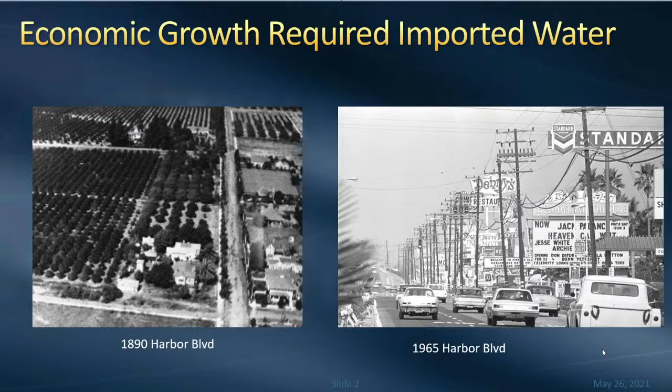Our water supply today here in Anaheim, like many other Southern California agencies, comes from a combination of local supply, or groundwater, and imported water, which comes from two different sources. Next slide.

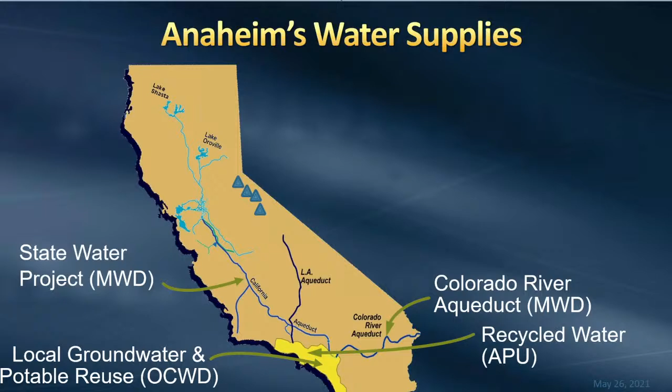About three-quarters of our water normally in a typical year comes from the local groundwater supply, and about a quarter of it comes from imported water, both the State Water Project and the Colorado River Aqueduct. A small portion is recycled water from our plant across the street.

Next slide. However, the local groundwater is not always available to us, even though it is our cheapest source of water, due to dry conditions and other issues. For the past year, PFAS has been detected in our groundwater, and most of our wells are now offline.

So we are now relying more on imported water. As you can see here, three-quarters of our water this year is now imported water. This flexibility and diversification in our water supply sources provides Anaheim a tremendous benefit of reliability by having this imported water whenever we need it.

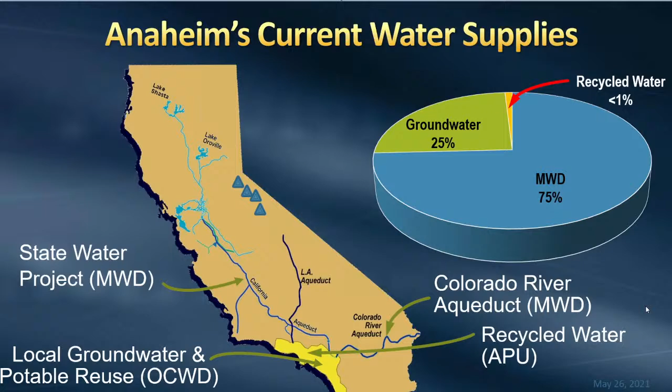Next slide. So Southern California has a similar story of being able to rely on that imported water. In a normal year, Southern California has an imported water demand, in addition to their local supplies, of around 2 million acre feet. We're going to use the abbreviation MAF for million acre feet. You'll see that throughout the presentation.

That comes from a combination, on typical years, of about 1 million acre feet from Northern California through the State Water Project, and 1 million from the Colorado River. This is what typically happens. However, next slide.

But as imported water changes, especially in Northern California, due to issues with the Delta and dry conditions, that water from Northern California isn't always there. So with that, Metropolitan Water District in some years looks to purchase additional water on a short-term basis.

Our presentation that Demetri Polyzos will be going through today will talk to you about why and how they decide to purchase water, primarily in Northern California, in years like this.

Go ahead, Demetri. Great, thank you, Michael, and a pleasure to be here with you all this evening. As Michael said, we have two imported water supply sources. So what I wanted to do first is really focus in on how we do our planning.

We go into every year planning for both dry conditions and wet conditions, drought conditions and surplus conditions, because we know that how the year starts may not necessarily be how the year ends. We've seen in the past many times a dry start can end up wet and vice versa. Well, unfortunately for this year, we not only started off dry, but all things are pointing towards a very dry end to the year as well.

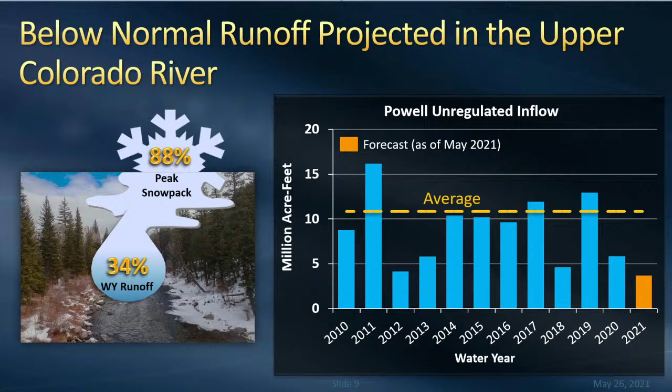In fact, the current projection for 2021, the bar graph to the far right, is projected to be the lowest in this time frame, the lowest we've seen in the last decade or so.

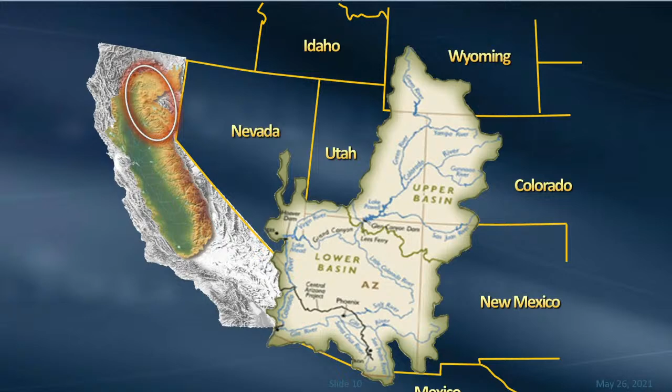And the same is really the case on the State Water Project. We'll focus here. The State Water Project supplies are generated in the Northern Sierra Nevada, and again, below normal snowpack, 72% of normal. Again, we're seeing the same thing we saw in the Colorado River system: the runoff is expected to be much further below normal, at 38%.

We have seen this situation on the Colorado River system before, but it's quite rare to see this on the State Water Project. This is one of the first times we've seen that disparity. But last year was also dry for Northern California, so these cumulative effects are really showing. The graphic on the right again shows runoff, and same as the Upper Colorado River Basin, only about 3 of the last 11 years are above average. Similar to the Colorado River system, the projected runoff for this year is projected to be the lowest it's been in this time frame.

So those are the conditions we're experiencing this year. Now, our supplies on the Colorado River side, despite how dry things are, the agreements in place and the way that system is operated mean we expect to not see any cuts. Very different for the State Water Project system. On that system, we're allocated year by year, so basically how the hydrologic conditions develop will dictate how much water we get.

Right now for this year, we're looking at a 5% allocation. That's the lowest we've ever seen. It's only happened once before, somewhat recently, back in 2014. But this is the lowest we've ever experienced. And that translates for Metropolitan.

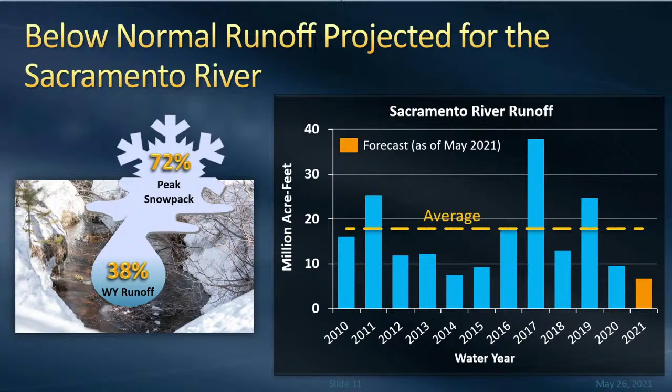I'll give you an idea of the volumes of water we're talking about as I stack up our supplies. On the Colorado, about 1 million acre feet, just as Michael indicated earlier. Again, no cutbacks on this system anticipated for this year, regardless of how dry things are.

But on the State Water Project, a mere 5% allocation. Our full, 100% allocation on that system is roughly just under 2 million acre feet. So 5% translates to about 0.096 million acre feet. On top of that, we're securing water purchases of about 0.032 million acre feet. We'll get into the details of that a little bit later. But all of this adds up to a supply of just over 1 million acre feet, 1.14 million acre feet of supply.

Now, our projected demand for the year is 1.7 million acre feet. So we have a disparity, a supply gap of roughly 500,000 acre feet. The question is, how do we fill this gap?

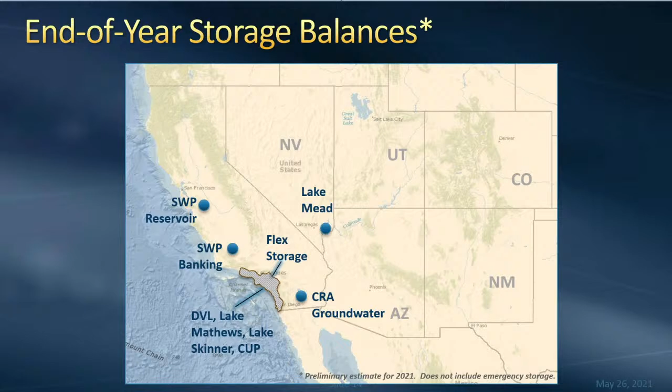But I want to focus in on the State Water Project facilities or programs. Part of our service area can only be serviced by water that comes through the State Water Project. These are the facilities, the programs that can help in meeting the demands for those portions of our service area that can only be served by State Water Project supplies or supplies conveyed through the State Water Project system. The graphic here shows the end of year balances of those storage facilities.

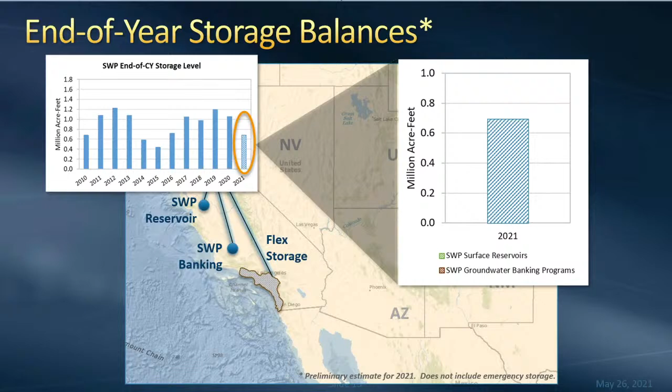We'll zoom in here where we are in 2021. We're looking at available storage in those reservoirs and those groundwater programs at about 0.7 million acre feet. You might be asking yourself, well, that's a lot of water. And it is. However, we need to dig a little deeper here and look at the details of the mix, the split between groundwater and surface water.

And what you see here, the majority of this water is groundwater. The challenges with groundwater, aside from water quality issues and the like, is that it has a small straw, meaning it takes time to move that water out of those programs. You have to, in many cases, pump that water out, and there are capacity limitations. As opposed to our surface water, which is represented here by a smaller amount, but there's a bigger straw for that water - water we can easily get to when we need it as we go through a year.

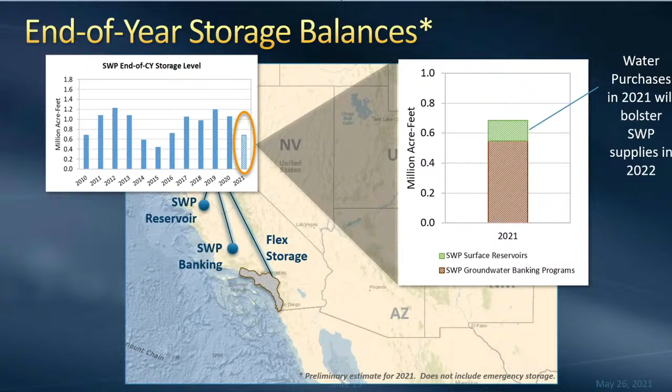So the purpose or the reason for purchasing water is not necessarily to get us through this year, but it's really to help bolster those surface water supplies for next year. I can't tell you where the State Water Project allocation is going to end up next year, but I can tell you the initial State Water Project allocation - we're going to start next year with a very low allocation. So the more water we have at the ready to use to service those areas in our service area that can only receive water from the State Water Project, the more surface water we have, the more reliable we will be. It's really keeping an eye out for what's going to happen potentially next year.

All right, so with that background as to what led us to the decision to purchase water, let's talk a little bit about the water that we purchase.

There's three basic types of ways that we can generate this type of water. The first is reservoir reoperation, and this is the simplest and most direct form or way. The surface water in a reservoir is essentially released, and then that water is transferred to a buyer.

The second type is groundwater substitution, and this occurs when a farmer uses groundwater instead of their surface water supplies. So the surface water that they would have used is then available to be transferred to the buyer.

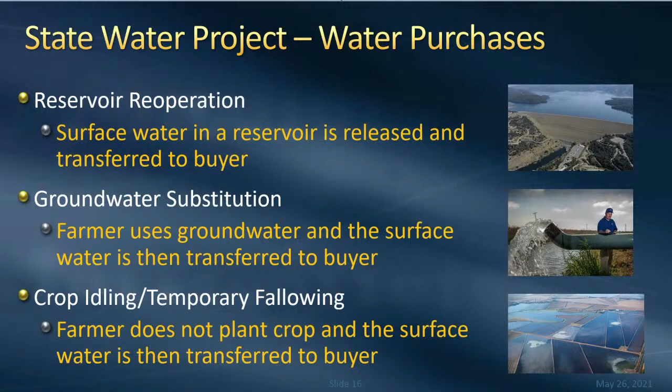And then the third is crop idling or temporary fallowing. This is where a farmer voluntarily chooses not to plant a crop, and the surface water that would have been used on those crops is then available and transferred to the buyer. So those are the three types of transfer supply types or purchase water types.

So let's talk a little bit about when that water is developed and how it gets moved through the State Water Project system. The water is typically developed between the months of May through September.

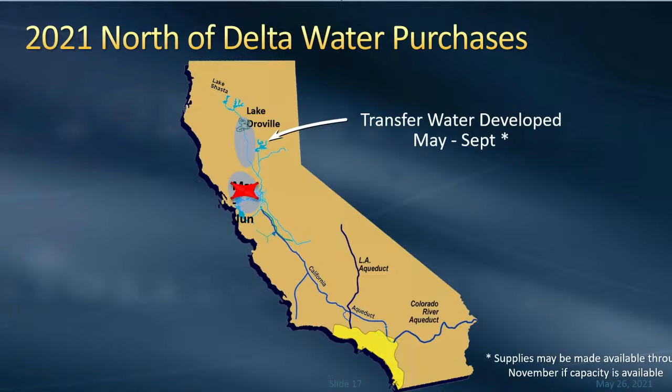The rub here is that water in the May and June timeframe cannot be moved through the Delta, based on environmental requirements and regulations. So that water can't move. It's developed, it's produced, but it can't be moved. So what we do is we store it in the State Water Project Reservoir, Oroville, up in Northern California. Then when capacity opens up in the summer months, when water is allowed to move through the Delta, that water is then conveyed through and pumped or exported out at Banks Pumping Plant.

There are losses associated with this water. You can think of it as a toll, like going through a bridge toll. Any of this water that is moved is tagged with a percentage of loss, typically 20%, but it can go as high as 35%. That's the range we're looking at. So for example, for every 100 acre feet of water that you move through the system, you need to leave behind 20 acre feet of that, if you're assuming a 20% loss.

Once you get the water through the Delta, it is then conveyed through the California Aqueduct and delivered to the buyer, in this example, Metropolitan. So you can see here, we are leveraging the infrastructure that has been built and that Metropolitan has been paying into, to be able to not only store the water until it can move, but then also move the water to us from Northern California.

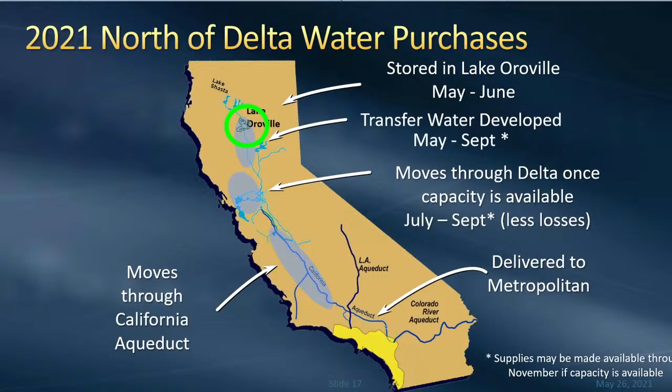So there are two types of north of Delta water supplies that Metropolitan is actively seeking or pursuing this year. The first is through the State Water Contractors Incorporated. This is a group of folks, a small agency up north that represents all or most of the State Water Project contractors, and they developed a buyers group. The State Water Contractors Incorporated negotiates for this water. This is done on an annual basis, and what was negotiated for this year was $625 per acre foot.

Just to give you some context, this is market based. The last time Metropolitan was in this purchased water and in this buyers group was, I believe, back in 2015. At that time, if I'm not mistaken, the cost was about $700 per acre foot. So it will fluctuate depending on the conditions of any given year.

Just to put this in perspective, keep in mind this is the water cost for the supply. Let's contrast that and look at our supplies from the State Water Project. Our allocation is 5% this year, but regardless if the allocation was 50%, 100%, there is no actual cost for the water supply. Where the cost comes in is moving that water to Southern California. So it's the power costs that are associated, and that's roughly $200 to $250 per acre foot.

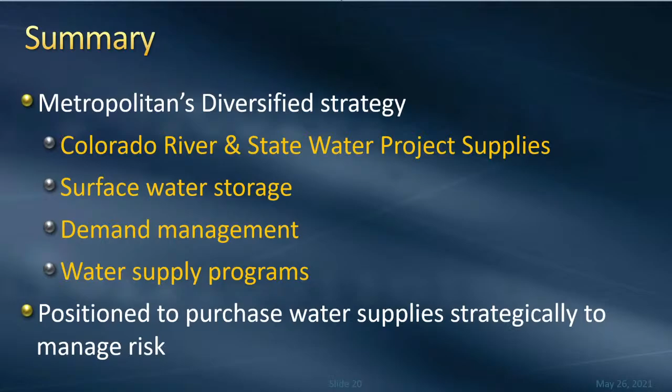At this time, I'd like to open the public hearing, which is item number 5 on the agenda, concerning the adoption of the City of Anaheim's 2020 Urban Water Management Plan and the 2015 Urban Water Management Plan Amendment. I have opened the public participation portion of this hearing.

I would like to explain the procedures that the Public Utility Board will follow in conducting this hearing. First, staff will make an oral presentation with supporting documents regarding the plans, after which the board will have an opportunity to ask questions of staff. Next, we will hear comments from the public, which may be in oral or written format. Each speaker shall have 5 minutes to provide public comment.

At the close of all testimony, staff will present closing remarks. After closing remarks, if any, the public hearing will be closed. Finally, the board may discuss all evidence presented to it, but may not ask additional questions or extend to the public who has testified without reopening the record.

Does any board member have questions as to the procedures for the public hearing? No questions. Does staff wish to make a presentation?

Yes. We have with us Philip Bogdanoff. He's our Water Resources and Planning Manager. He'll be providing a brief presentation on the plan and its relevance to us here at the city.

Thank you, Michael. Mr. Chairman, members of the board, I'd like to present a short presentation on our 2020 Urban Water Management Plan this evening.

For water agencies such as APU, believe it or not, a lot of the discussion around the water cooler is related to supply and demand.

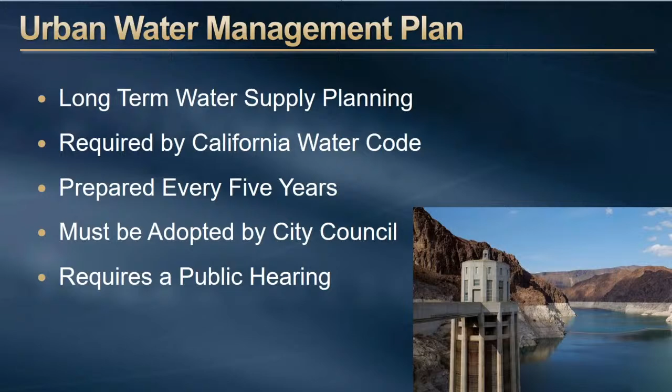Now, the urban water management plan does include a number of components to it, but primarily it is a document that does look at supply and demand. And so we'll go ahead and just dive into both demand and supply.

So we look at demands. It is important that we look at historical demands and historical demand trends, because that helps inform our projections looking into the future.

So if we look back about 20 years, we look at a single family home here in Anaheim with a family of 5, that home used about 220,000 gallons of water in the year 2000. That's about 15 average size swimming pools for the year.

In the last 20 years, Anaheim Public Utilities has invested in demand management programs. That includes education, public outreach programs to educate people to use water wisely, to not waste water. That includes rebate programs and incentives for low flow toilets, high efficiency washers, even outdoor incentives for turf removal to reduce usage outdoors. Another item that's changed in the last 20 years is that the plumbing code has been updated several times to require more and more efficient fixtures be installed for both new and retrofit construction.

So through these updates over the last 20 years, we've seen that same household in the year 2020 used only 140,000 gallons for the year. So through these demand management programs, we've seen demands decrease by over 30%. And looking at these trends, we do expect that these trends and behaviors will continue through the 25-year planning horizon that we are looking at in the urban water management plan.

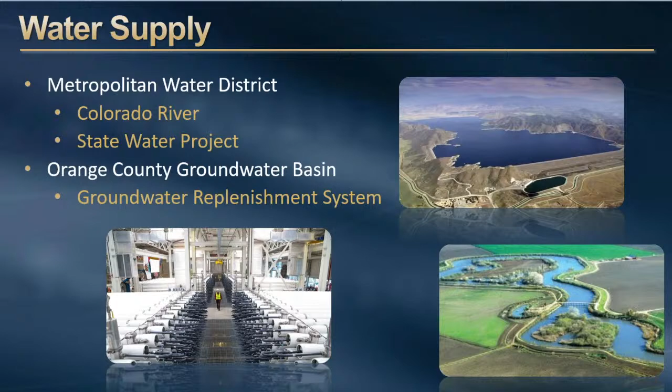Also, when we look at our water supply, we don't look at water supplies one at a time - we really look at the water portfolio. We try to balance our water supply portfolio in looking at reliability, looking at the quantity of supply that's required, and looking at what that cost is.

So as discussed, we look at the State Water Project, for example, and we've heard that over a period of 3 or 4 years, the allocation for Southern California has gone from 85% to 5%. That's a difference in water supply of about 1.5 million acre feet of water. So there's plenty of water to be had when it's available, but the reliability of that water source is highly variable.

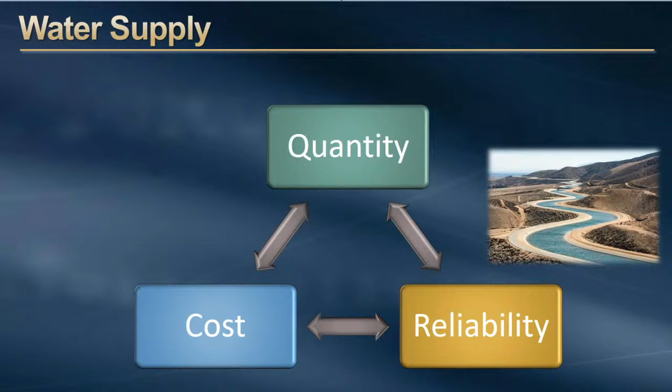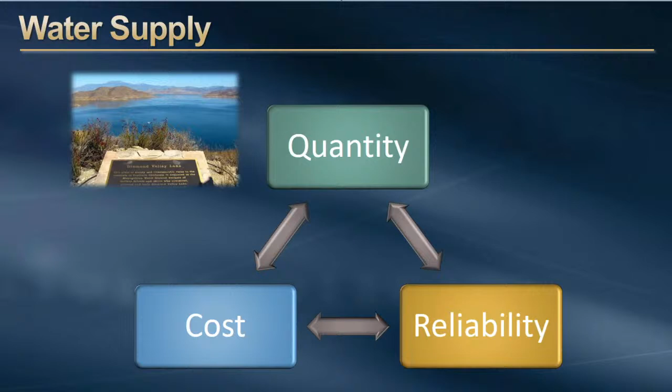To help mitigate against that, Southern California has invested in storage, such as Diamond Valley Lake, to help mitigate those swings in reliability. And finally, there's also water purchase, water transfer, and water banking programs, where some of these programs may not be the most cost-effective supply options, but they do serve a purpose in the whole - they help maintain storage levels and mitigate against the variability in reliability.

So all of these together make up that balanced water supply to ensure that we have the right amount of water at the right time to meet the demands here in APU.

Now looking a little bit closer to home, APU and other Orange County water agencies have invested in the groundwater replenishment system managed by Orange County Water District. This system takes treated wastewater, purifies it, and uses that water to help supplement and recharge the groundwater basin. What's so important about this strategic investment for APU and the other producers here in Orange County is that this project is an example of a water supply that checks all the boxes.

It provides us with a quantity of water proportional to what we use here. It's very reliable in both dry and wet year conditions and is at a very competitive price. Bottom line is that investing in this type of strategic project gives a very good benefit to our customers at a very good price. These are the type of opportunities we look for when trying to maintain or supplement our water supply.

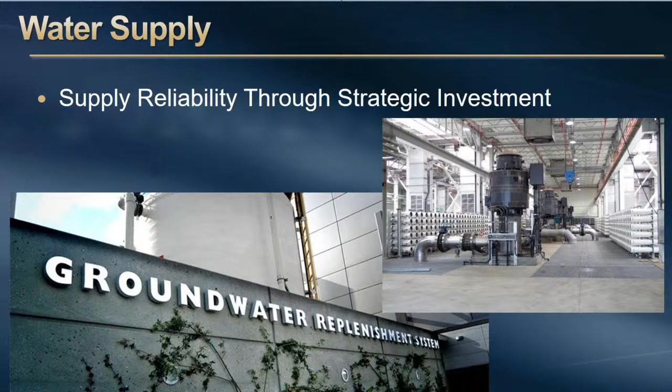So as discussed, the Urban Water Management Plan does contain a variety of factors that we need to take a look at. Principally, it's supply and demand, for which we talked about. However, there are a few items we did want to point out to you that are new for 2020.

In 2020, the Department of Water Resources now requires that water suppliers report on their energy intensity—the amount of energy used to supply water to its customers. Because it's a new item, DWR issued a last-minute update to their reporting requirements. That update is contained in the staff report and will ultimately be incorporated into the final report.

The second item is an amendment to our 2015 Urban Water Management Plan. Essentially, this document documents APU's reduced reliance on the Bay Delta, not only for us, but for Metropolitan and all the member agencies.

Why that's important is it shows that for any proposed project, such as the Delta Conveyance Project or the tunnel project in the Bay Delta, that project is not going to lead to an increase in reliance on the Delta. It shows that overall we're all decreasing our reliance on the Delta, and that the focus of that project is really to either maintain or improve the reliability of that water source.

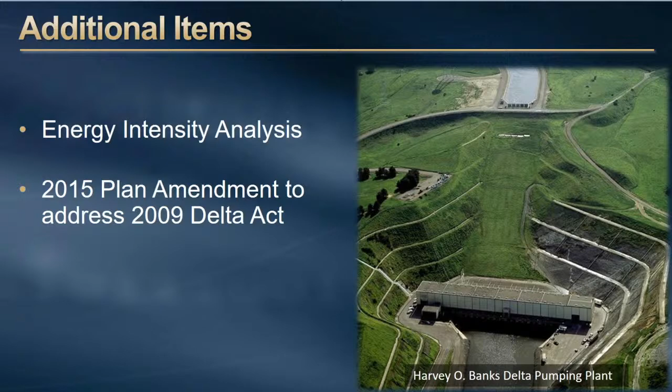Through this process, and through other studies Anaheim has done in the past, we've asked the questions and, just as importantly, we've been able to answer these questions related to supply and demand. Through this exercise, we've shown that Anaheim Public Utilities does have sufficient water supply to provide for the demands here in the city over the next 25 years.

We do not project any water shortages within the 25-year planning horizon. However, it is possible that Anaheim Public Utilities may be called upon again to pull those levers in the future because of a mandated reduction. But based on the analysis, we do not show any actual physical shortage that APU is going to experience over the planning horizon.

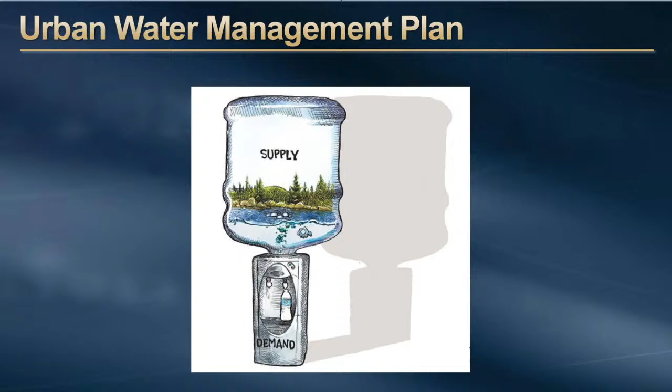To finalize the plan, the Water Code does require a public hearing, for which we're here this evening. It does require City Council consideration, for which we are asking you to recommend here tonight. After approval, that plan will be submitted to the Department of Water Resources by the July 1st deadline, and then filed with the appropriate agencies after that. With that, I'd like to close and thank you all very much for your attention.

I wanted to make a comment as we thank again the Mayor Pro Tem for joining us for the water presentations. The slide that Philip showed in terms of water demands shows that in 2000 we were around 80,000 acre feet per year, and we're projecting by 2045 about 65-ish thousand acre feet. In previous versions of this plan, previous years, we were looking at 90,000-plus acre feet. So our demands have dropped significantly because of all the factors Philip pointed out. Thank you so much, Philip, for the presentation.

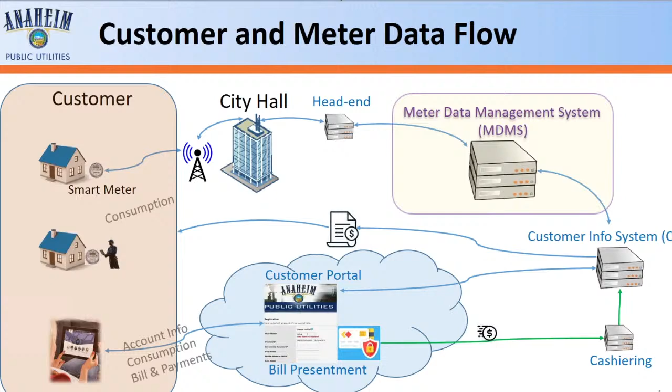Motion carries. Thank you. Next item, we have an update on the electric system.

Thank you, Mr. Chairman. Peggy has a slide I'd like to share with the board. At the last board meeting, I expressed our concern with Mylar balloon outages. We had a number, and I'm happy to report those have gone down. I attribute a lot of that to Melissa's group sending out public service announcements on how to handle metallic balloons, and we've seen a significant drop. That's very positive for us.

As that fire progressed, our security cameras captured the images and alerted our system operator, who was very concerned and called in our substation crews. The reason for the concern is that like dense fog, smoke also acts like a conductive blanket over electrical equipment, so the denser the smoke gets, the higher the risk of arcing with electrical equipment.

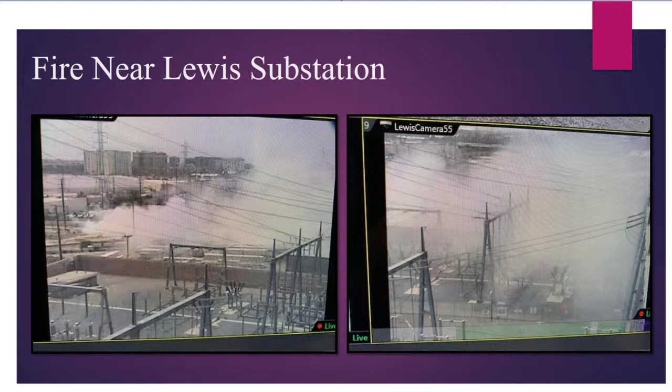Can you go to the next slide? You can see there where the fire department had that pile of wood, in the vicinity of the back corner of our substation. You see another wood pile there.

So as we were watching this, we thought, what are we going to do with that? We've identified that it's our power line tree trimming crews who have stored some of their wood trimmings. But in this particular case, at least it's in a secured, fenced-off area, whereas the other pile was by the railroad tracks and open to the public.

So we will work with our utility tree trimming contractor to remove that pile of wood, relocate it, cover it, whatever it needs to be. And as we see any other debris around the perimeters of any of our other substations, we'll find the owners of it and work with them to relocate it if it warrants it.

So I just wanted to share that with the board.

That's good, thank you, that's all I have. Thank you, and I don't remember any questions. Hearing none, next item, we have an update on the water system items.

Mr. Moore: the first thing is our water supply dashboard that you have in front of you and up on the screen. Very similar to last year's presentation, the storage levels at the top are all declining. This is the time of year when usually the snow melts from either our local mountains, Northern California, or the Colorado River, and levels start increasing. We're still seeing a decline because of very dry conditions, which are indicative of the drought that we're in and that we plan on being in.

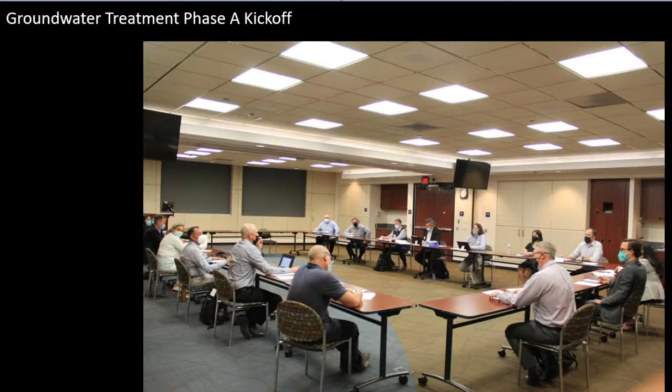The Ducks were a great partner that we had, that we partnered with. They got a tour of the locker rooms, they got a tour of the entire ice rink, and the kids had a really good time. Thanks to Wild Wing, not thanks to me. They were very entertaining.

And that is it. That's all my updates. Any questions?

Hearing none, we'll move on to an update on finance and energy resource items.

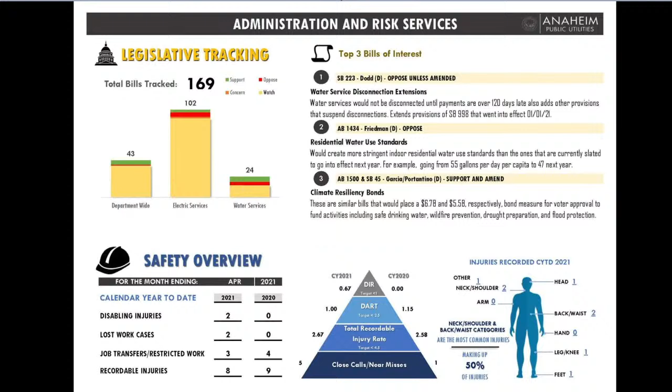In closing, I want to share some of our ongoing efforts on customer service. Customers are becoming increasingly more comfortable with online services and expect them. So we're initiating a campaign to increase awareness of the services we currently offer online, including a new incentive to sign up for outage alerts, since that's one of the events that triggers our call volumes. We're trying to minimize that.

We expect over the next few months, as the state opens up, that customers will have many questions regarding their accounts. So we'd like to help them be aware of all the self-service options so they can get information quickly and efficiently without waiting on the phone. The services include bill payment and online balance checking, and we're also exploring additional services like customer turn-on, payment extensions on the IVR, and fraud reporting.

In closing, I'd like to thank you, Chairman Medrano, for your service on the Legislative Working Group. Your representation to the customers has helped shape our representation in Sacramento and at the federal level as well. Thank you very much for your time.